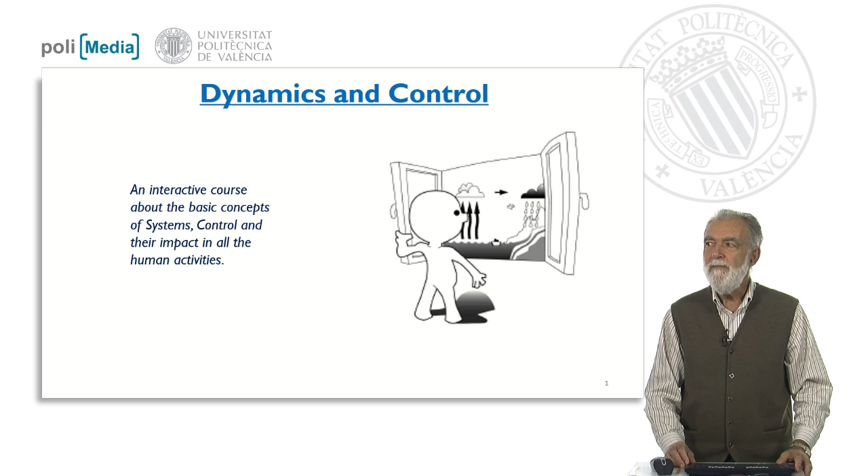We are going to spend the following days developing this interactive course about the basic concepts on systems, control, and their impact in all human activities. My name is Pedro Albertos, and I am Professor of Systems Engineering and Control at the Polytechnic University of Valencia in Spain.

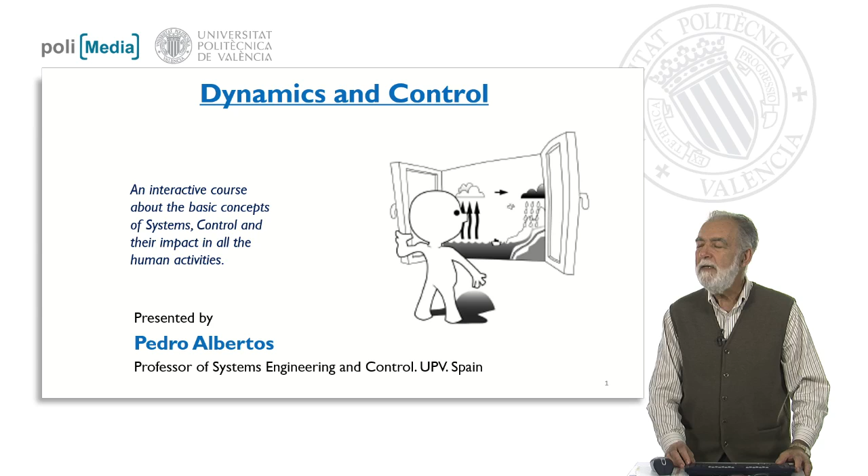In our course, we will develop several modules, and each one will comprehend different videos and also some questions and exercises, as you will see. The first one will be examples of systems and signals, just to know what we are going to deal with during the course. These systems and signals will be modeled, and the second module will develop this kind of models. In particular, we are interested in systems which are controlled.

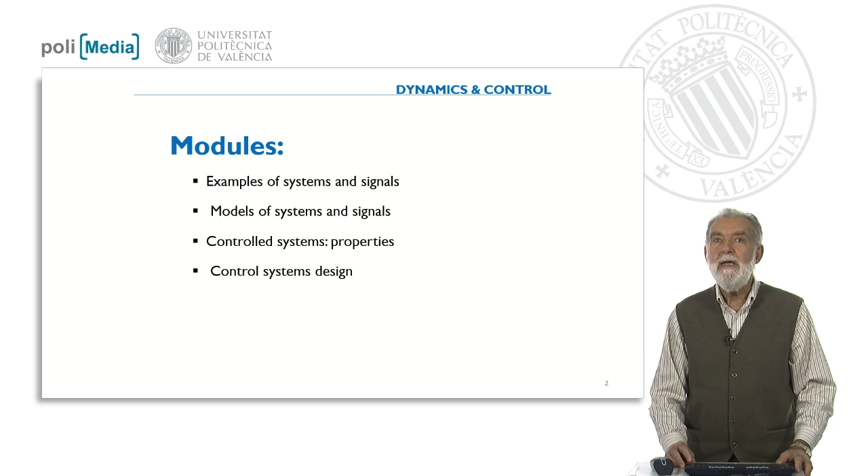Then we will analyze the properties of controlled systems, and we will try to learn a bit about how we can design control systems. All this is because we get a lot of benefits from control, and we will devote a module on control benefits. Finally, we will develop some tools to analyze and study the different topics we have treated in the previous modules. So let's start with some examples about systems.

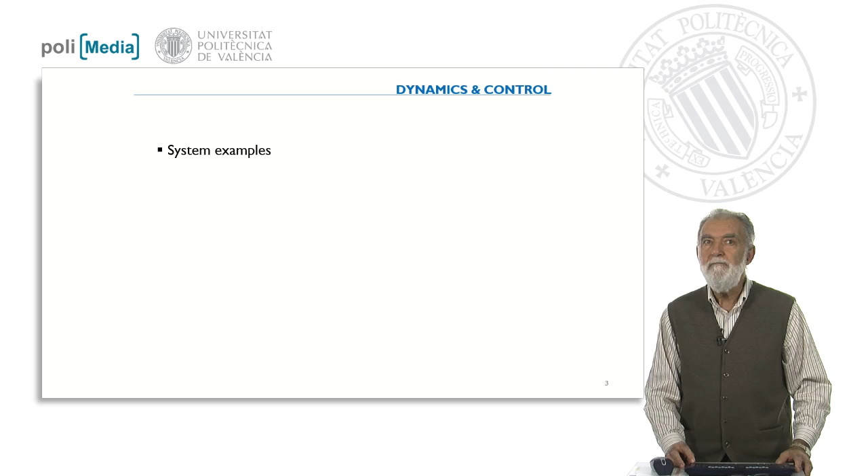A system could be, for instance, a mobile. All of you know what a mobile is, or a car, of course. This is a system, but we have systems also in the industry, where we have a robot, like here, and also a workshop where you are mounting, assembling some cars, for instance.

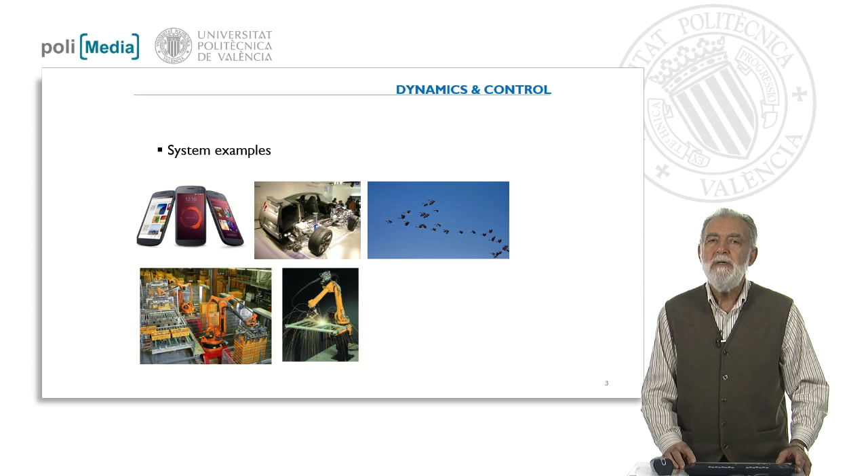But you have also systems in nature. For instance, here you can see a flock of birds, and they are interacting, exchanging information, so they are coordinating in some sense. So they constitute also a system. But systems can be also at a very small scale, like for instance in molecules, which are also composed of many small components interacting among them.

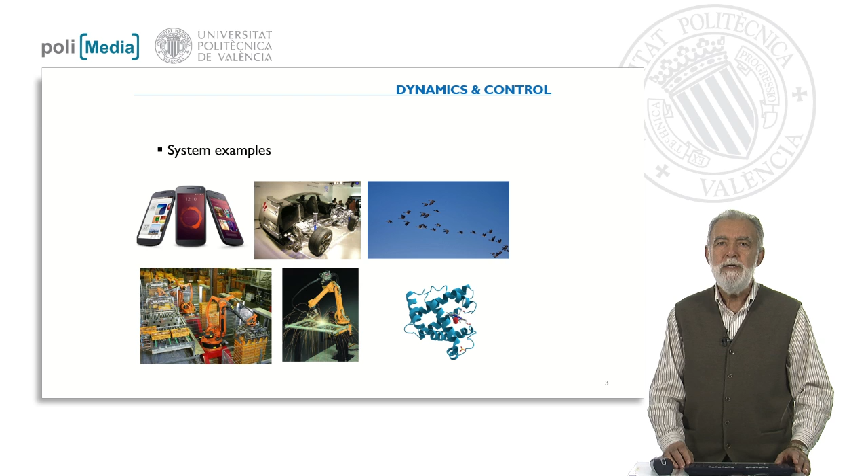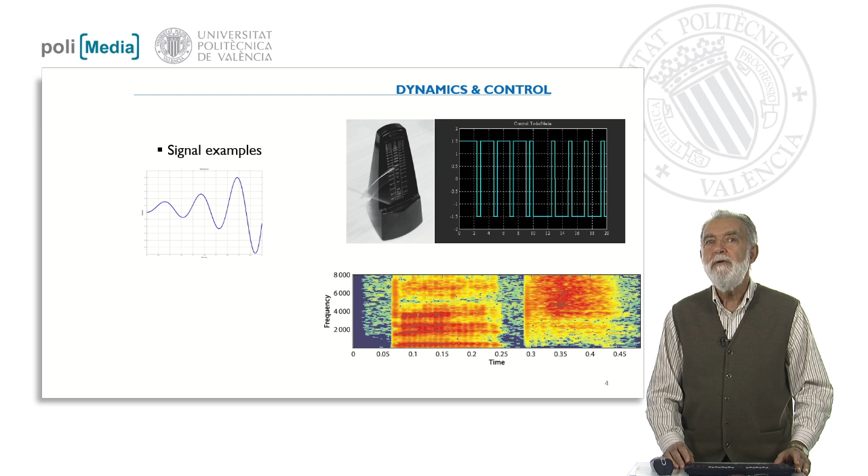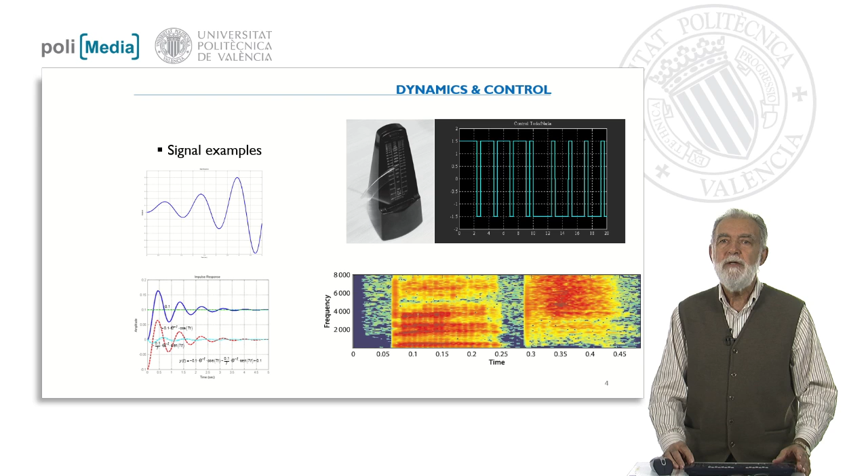But the most important thing is that signals carry some information about the systems they come from, or just information we are interested in. For instance, information could be the temperature in the room, could be the speed of the wind, and this is information for us to react and to perform some activities.

So the first module will cover in detail some examples of systems and signals. In particular, we will be interested in dynamic systems and the concept of feedback. Feedback is a key concept in our course. Feedback is the most important concept appearing in many fields of science and engineering.

Once we know about systems and signals, then we will try to model them. For instance, here you can see three different systems: the flow of water in the river, the flow of cars on the road, and also the information flowing on the cable. They are very different in supporting technology.

In one case it's hydraulic, in another case it's just cars, or it's just electronic information. But all of them have some similarities, and that means that even though they appear so different, they can be modeled in a similar way. The same happens with signals. We may see different signals, and they bring us some information, but this information can be characterized and represented in models which are easier to store, to transfer, to discuss, and to understand the process itself.

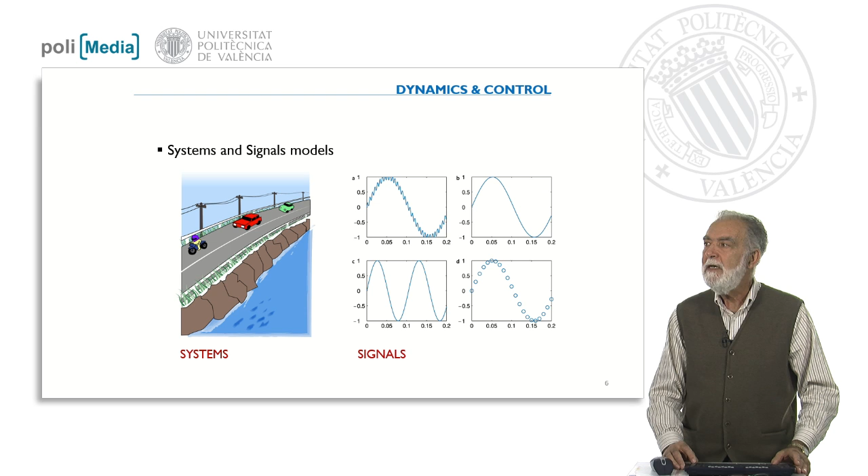So we will see representations of systems and signals, and we will see also about analogies. As I mentioned at the beginning, we are interested in controlled systems, so we will see some properties of the controlled systems. For instance, most of the systems are of the kind of reaction: we are feeling cold, and then we start to tremble to raise up the temperature, or on the other hand, if we feel too hot, then we put some air to be more refreshed.

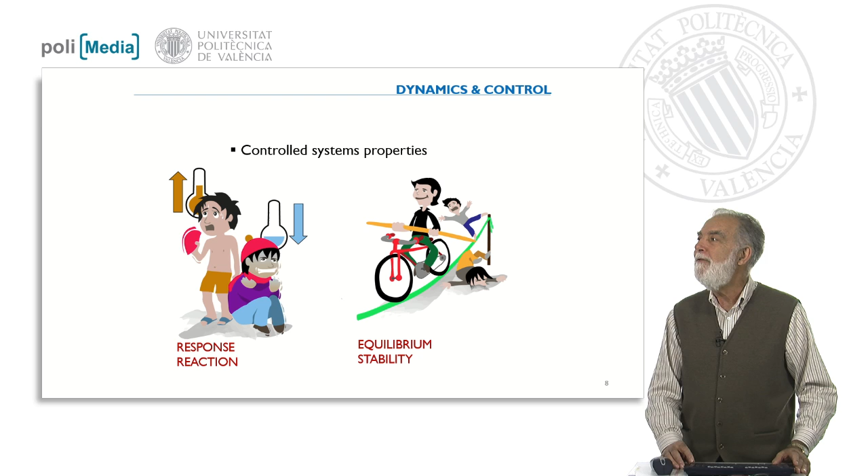One of the very important properties of the systems when they are controlled is the stability. If you see this boy on a bicycle, this is a system, and he is acting in such a way that he is keeping in the vertical position over the string. So stability is not so funny like here, but very important in all the systems.

So we will have a module about the static and dynamic behavior of the systems, and about the sensitivity and robustness of the dynamic systems. Then we will see about how we can design control.

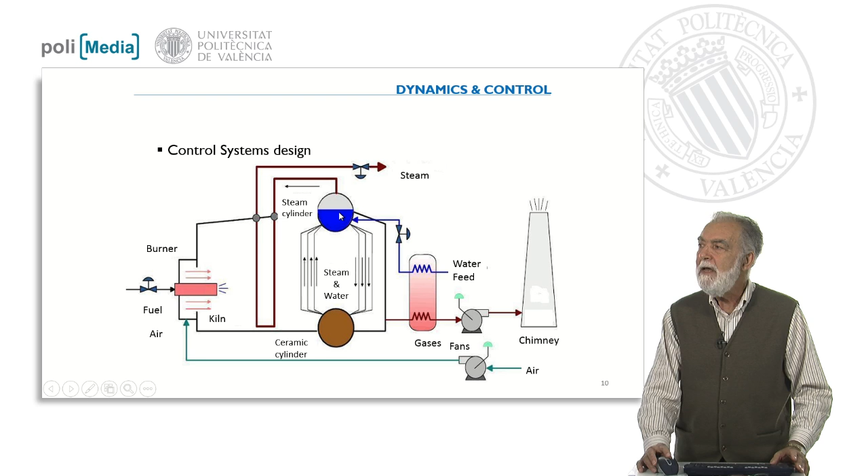For instance, here we have a power plant or steam generator. In the center we have the drum where the water is boiled and the water is circulating, and we are getting some input of water, some input of fuel to burn, and we are getting out some steam. We want to keep this plant, which is much more complex than the examples we have seen before, operating in some given conditions. For instance, we want to keep the level of this drum, the level of the water. We want to keep the temperature or the pressure of the steam. And for that we need a control system.

The control system is taking some information from the process. We are getting some information about the level of the water and also the temperature of the steam. Then with this information and some requirements, we are recording the evolution of the system, or we are just acting, opening this valve or closing this valve. So we are controlling. And then we need to design this control system.

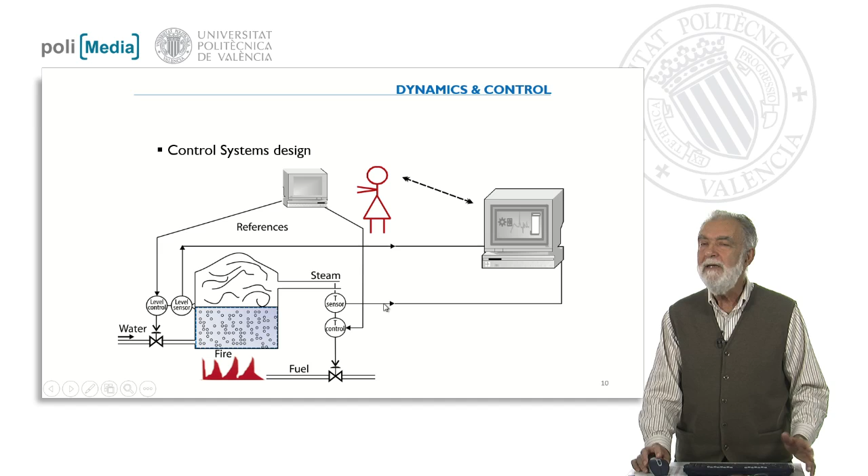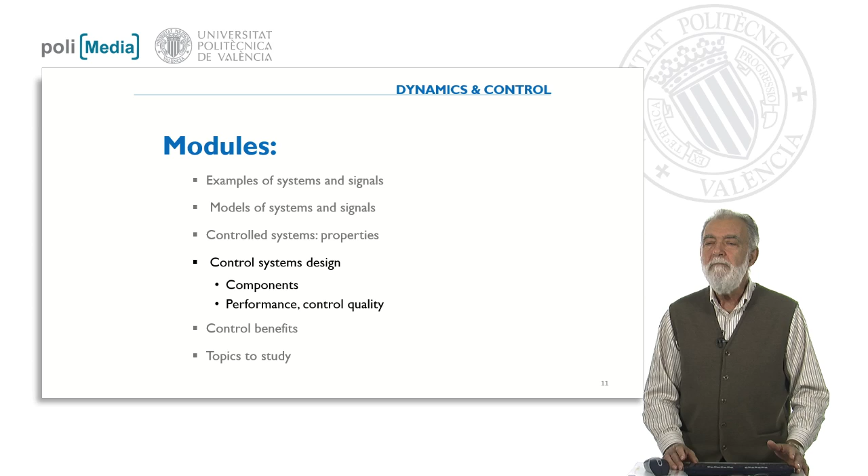In this module about control system design, we will see the components that we have been discussing before: the sensors, the actuators, the controller itself. And we will try to give some idea about the performance of the control, something which we can say in a qualitative way—it's good, it's very good, it's bad, it's not very good—but we will put some measurements, some figures to indicate what is the performance and what is the quality of the control.

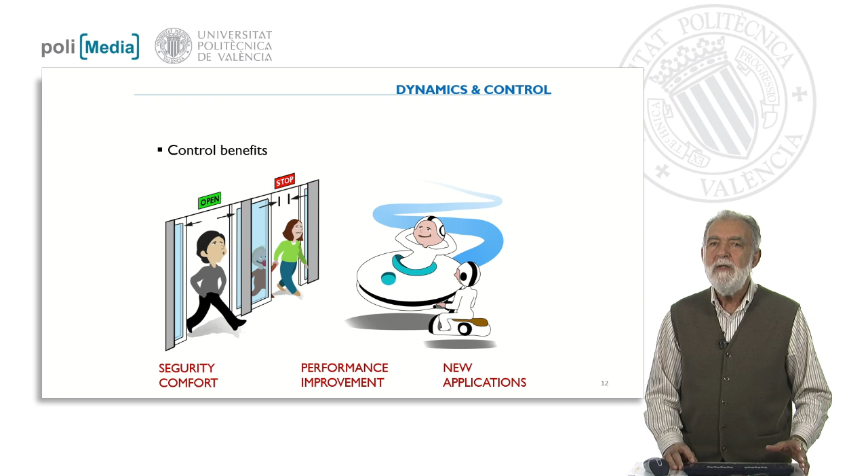As I said at the beginning, the main aim of the control is to keep the system running in some given conditions, and by this way we obtain some benefits. So the main benefits of the control are to improve the security, improve the comfort, improve the performance, and also to foresee new applications which are not easy or not feasible if the control is not good enough.

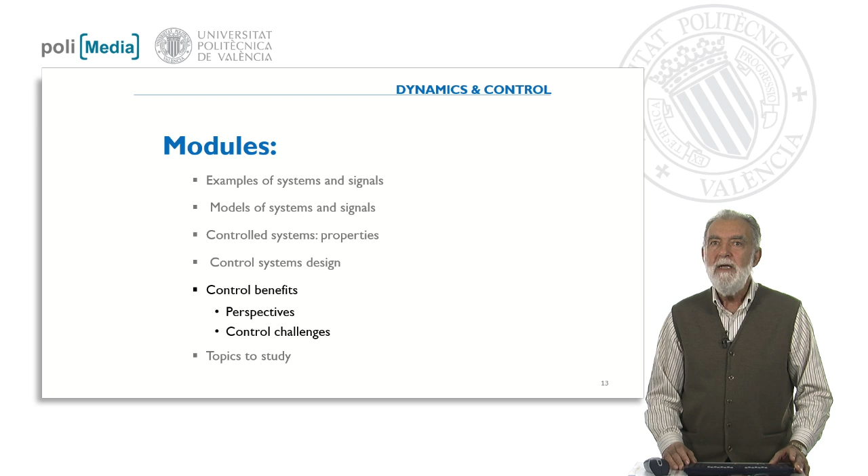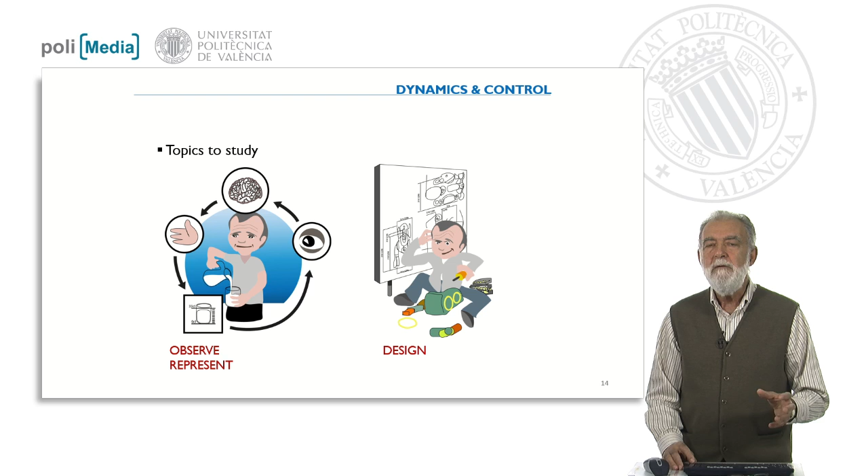So in this module, we will analyze the perspectives of the control and which are the control challenges. Finally, in the last module, we will discuss what are the main topics to study. We must observe, represent the systems and the signals, and we must design in which way we make a control system to achieve some performances.

In this module, we will see tools for analysis and modeling, some tools for design, and we will discuss briefly about the problems in implementing control systems.

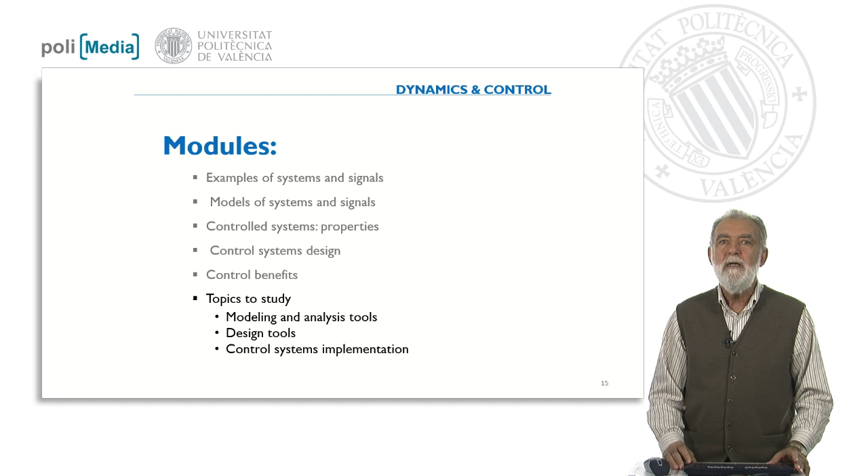So, what have been seen today in this session? Mainly, what is the content of a short course on systems, signals, and control. And we have been discussing what are the main concepts and what are the main problems and how to deal with them.

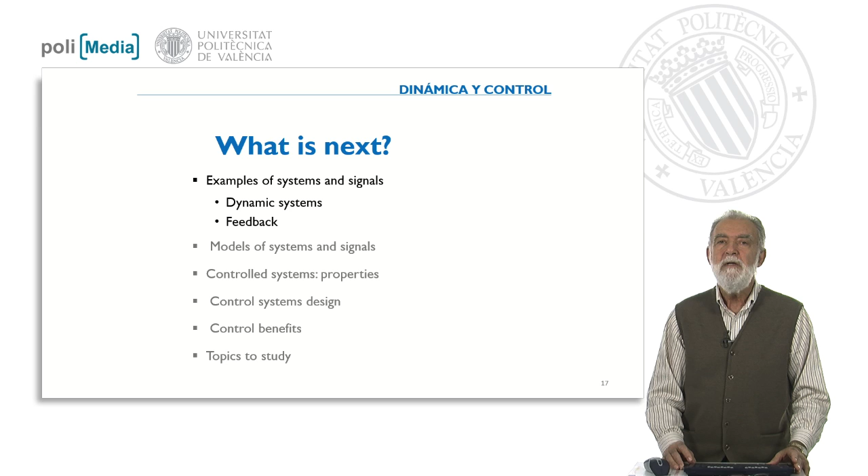So what is next? Of course, we are going to start with the first module. Then we will see examples of systems and signals, dynamic systems and feedback, and we will see the variety of systems and the variety of signals that we can find in reality, in nature, and also in human-made systems.